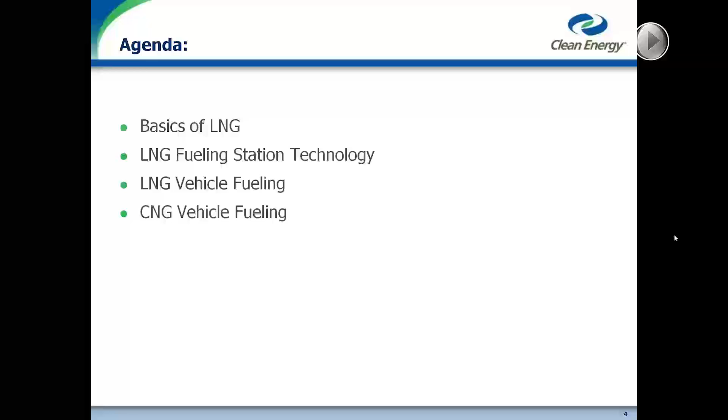The things I'd like to talk about today: anytime we have the numbers 101 in a title, I should give some basics of LNG. I'll give some safety and property information of LNG. Then we'll start discussing LNG fueling station technology, what the stations are made of, how they work. We'll discuss LNG vehicle fueling and then CNG vehicle fueling, and then leave time for questions at the end.

So basics of LNG. Probably most of you have seen some of this before, but for the benefit of those who might not have, I'll go through this quickly. LNG is simply natural gas that's been refrigerated to -260 Fahrenheit, which reduces its volume greatly, 600 to 1, and gives it a final density of about 3.5 pounds per gallon at 0 psi. Now this is a little less than half the density of diesel fuel, but it is quite a bit more dense than CNG, and it's that density comparison to CNG that really makes it viable as a vehicle fuel for many applications.

LNG is made typically at liquefiers that can be dedicated for vehicle fueling. Clean Energy has 2 of them in Boron, California and Willis, Texas, and then the rest of the fuel in the market can come from peak shavers. Peak shavers are just natural gas utilities who are selling excess LNG into the vehicle market that they don't need for buffering their pipeline operations.

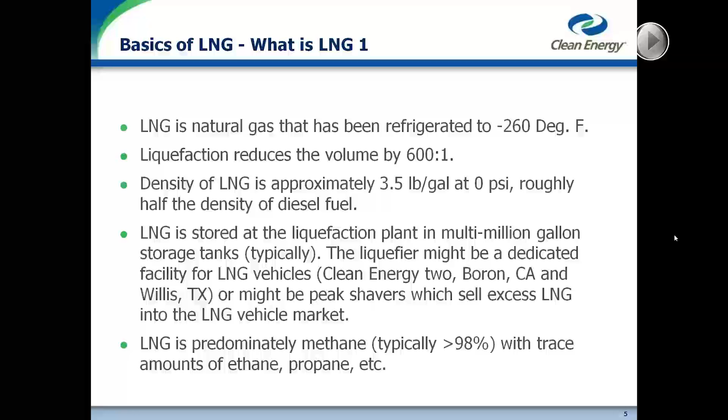LNG is predominantly methane. As we manufacture in our liquefiers, it's typically 97 or 98% methane with a little bit of ethane and propane as trace elements. And this is also typically better than pipeline gas that might be in the CNG compression business, which can be a little more variable than that. So that's also one of the benefits of LNG.

LNG is colorless, odorless, and non-toxic. As far as I know, no attempts have ever been made to odorize LNG in the vehicle business. So it's typically not odorized, which means we use methane detection as safety devices to detect a leak or a spill. LNG is flammable after it vaporizes and mixes with air. Not flammable as a liquid, but as a liquid it will boil off rapidly, mix with air, and then become flammable. That's the whole point of LNG as a fuel after all.

Cold methane is denser than air and can settle in enclosed areas. Once the methane warms, it will rise and disperse as long as it's not inside a building or other enclosure. So the fueling we do typically is out in the open air. There's nothing to prevent the methane from rising and escaping if there is a small spill, so it's relatively safe in that regard.

A more recent application is to make LNG from landfill gas, which is a renewable resource and prevents that methane from going into the atmosphere as a pollutant. And trash haulers especially like that because that gives them a landfill-to-truck source of fuel.

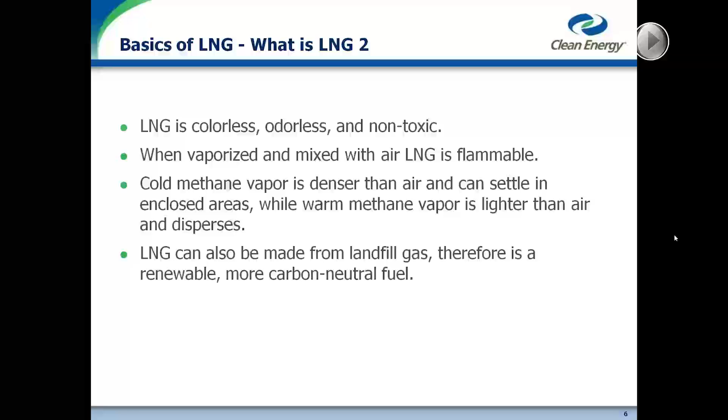Some of the basic hazards, as we said, methane is flammable, but only within a specific range of concentration in air, about 5 to 15%. Outside of this range, it's either too lean or too rich to burn, and is safe in that regard. Since the LNG is at minus 260, there is a hazard for frostbite or freezing if there's direct contact to the skin or eyes especially. So we always want to avoid that.

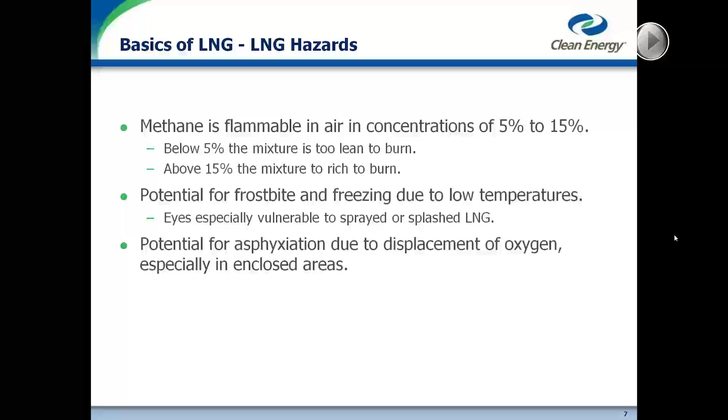And then asphyxiation due to displacement of oxygen is a concern only in enclosed areas generally. Buildings or other enclosures are the main risk there. Again, our fueling stations are typically very open in the outside air, and asphyxiation is not a real concern for that application. Some basic safety equipment we always recommend: cryogenic gloves, a face shield, closed shoes or boots, long sleeves, long pants.

One thing for operators and fleet managers to be aware of is I've seen over time that LNG fueling becomes so routine that operators sometimes don't always put on the right safety equipment. Especially in hotter climates, they may not want to wear long sleeves or gloves. And I think it's always important to be vigilant to recommend and stay up with the protective equipment and training of the operators.

Some basic hazard prevention then is just to always follow the recommended operating procedures, wear the protective equipment. If there's a leak, avoid it and contact the technician to repair the leak. Don't handle cold hoses and piping without gloves. Always keep sources of ignition away, especially smoking. The vehicles themselves, as they pull in for fueling, are not considered a source of ignition per the code. So the normal vehicle traffic is okay, but other vehicle traffic adjacent to the station, we'd like to keep that at least 15 feet away so we aren't bringing another hazard close by.

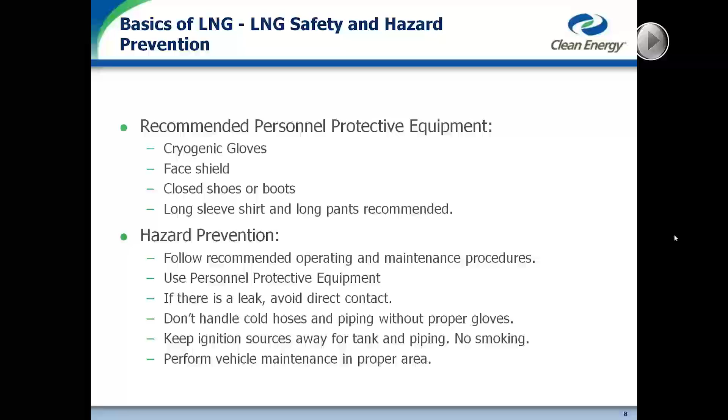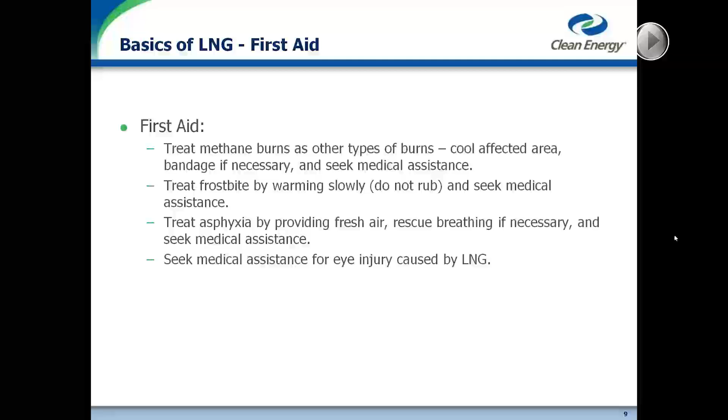And finally, perform vehicle maintenance in a proper area. That means if you work on LNG vehicles indoors, then building modifications are typically performed for ventilation and methane detection. First aid is pretty simple in case of a burn due to a fire, frostbite due to contact with LNG, or asphyxiation. Basically use common sense and seek medical attention wherever appropriate.

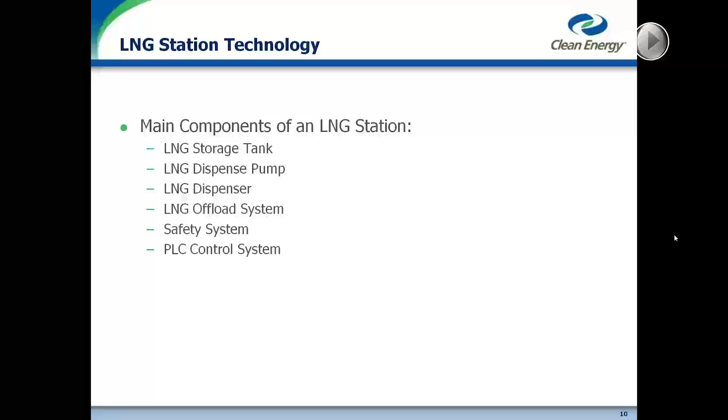Okay, now the LNG stations themselves will be the focus of our discussion. That's our background here at NorthStar and our specialty. I'll kind of discuss the storage tanks, pumps, dispensers, offload systems, safety systems, and PLC control systems. These are the major components of any LNG fueling station.

First, the LNG storage tank. Currently, in the U.S. at least, we are building stations with 18,000-gallon gross capacity storage tanks with 175 psi working pressures. The net capacity of LNG we're allowed to put in these tanks per code is 90% of the gross capacity, and that's true for whatever size tank you might go with.

In the U.S., we're also building most of our stations with the foundations to allow easy upgrade to 2 tanks, and many of our customers would have that feature as well. For sites that have no provision for future expansion, they would just get a foundation for a single tank. Now, we aren't limited to 18,000-gallon storage tanks. We have built stations with up to 30,000-gallon storage tanks for customers with large fleets and high usage requirements.

So in sizing the tank and selecting the right tank, some considerations to take into account. The daily amount dispensed is important because LNG is delivered to the stations at 10,000 gallons at a time in LNG tanker trucks.

And what we'd like to be able to do is use the fuel in the station to the point where it can take a full 10,000-gallon tanker load. And at that point, we need to have a window where we can refuel the station without running out. And if you have a very high usage station, the rest of that fuel may be consumed very quickly, and that makes the logistics very difficult. So at a certain point, if usage goes up, then larger tanks or a second tank would be warranted for consideration.

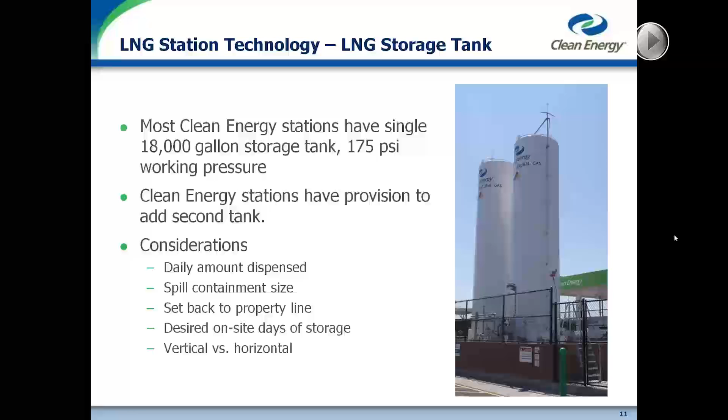As a standard practice, we design our dispensing systems to flow 40 LNG gallons per minute to either 1 or 2 dispensers. In practice, if we're feeding 2 dispensers simultaneously, it might be closer to 35 gallons per minute at each dispenser, but those are our targets.

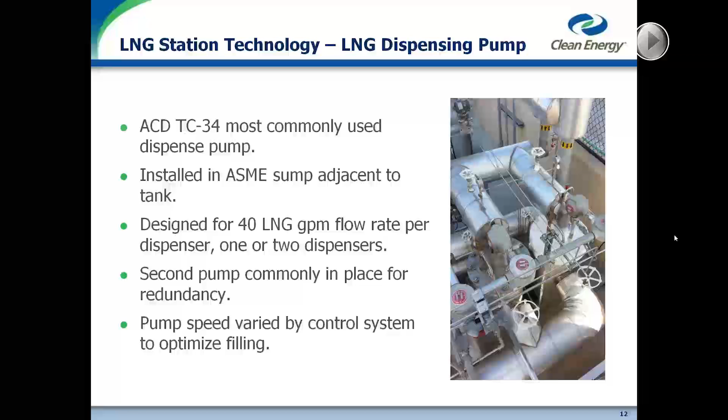and to be fully weights and measures certified, you would also demonstrate accuracy to your local jurisdiction upon startup, which we have been doing for our customers lately. Most jurisdictions do not have the right test equipment and don't know what LNG is, frankly, so typically we will go on site with our test equipment and technicians, demonstrate the accuracy for the weights and measures officials, and then we can get an official certification sticker on the dispenser.

One issue of contention right now is the unit of measure, the DGE or diesel gallon equivalent, is not fully certified yet by weights and measures authorities. That is scheduled for a vote this summer, and hopefully they'll pass it, but that's up in the air. And another result of that is that every provider of LNG has a slightly different conversion factor.

Now the fuel stations are loaded with LNG from tanker trucks, and we use this pump on board the LNG station to pull the LNG from the tanker truck and pump it into the storage tank. Now there's a bunch of different pumps that are suitable for that. We use the same pump design and pump can that we use for our dispense pumps, and for us, we feel that this gives a faster cool down, good priming, and also lets us use the same parts for both dispensing and offloading. One factor to consider is the location of the offload connections.

We like to place them on the back of the station opposite the dispenser so that while you're offloading a tanker truck, you can still be dispensing to vehicles. If your site does not have the room to allow that to happen, or the traffic patterns, then we can put the offloading on the same side as the dispensers, but now you're blocking at least one lane while offloading is occurring. Typical pumping time for offloading is about 70 minutes or about an hour and a half if you include the time to connect the hoses, cool the pump, and then disconnect the hoses when you're complete.

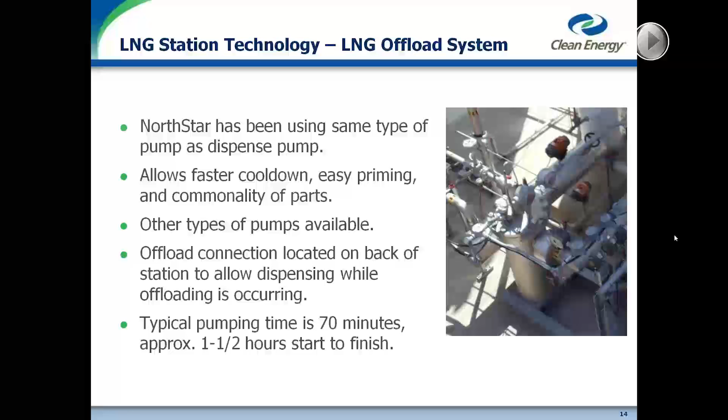All LNG stations have a safety system, including an emergency shutdown system. This is largely dictated by code requirements. Typical implementations will have fire detectors viewing different angles of the station, methane detectors at different locations, emergency stop buttons, which are typically at all the dispensers and at other sites around the perimeter of the station.

And if any of these devices are tripped, immediately all the valves on the station are closed, the pumps are stopped if they're running, and we remove power from all the electrical equipment that's in the LNG dispensing areas or containment area. So that way if there is a leak in progress, we minimize the chance of a fire by taking all the electrical sources out of action.

The important thing to remember too on this, if this system is activated by code, it has to be reset manually at the station. We can't log in and reset that remotely. So it has to be by a technician who is verifying that the station is ready to operate and any issue has been repaired. I think we've mentioned the spill containment already. That's a standard code requirement in the U.S.

We also include an auto dialer or fire alarm control panel. So in the event of any type of emergency alarm or process alarm, such as low tank levels, we can program that to call out to either Clean Energy, if it's a site we manage, or to our customer, or to a third-party monitoring system.

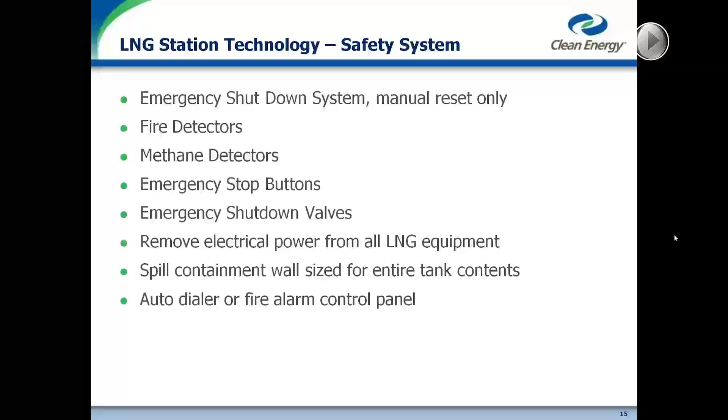And finally, we include on our stations a PLC control system to automate the operation of the station. So the PLC has transmitters which allow it to monitor tank level and pressure, the temperature, pressure, and speed of the pumps, the flow and temperature and pressure at the dispensers, and also for the offload pump. The PLC has operating logic which automatically runs the various processes so that the operator has to do very little except press start and allow the system to operate.

A standard feature that we've also been using for the past 6 or 7 years is to have a built-in web server in the PLC. And what this means is that if we have remote access either through high-speed internet and a VPN or through dial-up modem, you can dial in to the site, and with nothing but a web browser and the right password credentials, you can log into the station, see what's actually happening right now, as if you were standing at the control panel right on the site.

So that's a huge benefit for remote troubleshooting, for maintenance, for checking the status of a station, scheduling liquid deliveries, just in general helping the station run correctly. Now the PLC we program to automatically recover from as many faults as we can, but there are some conditions that may require technical assistance. And as an example, that might be a sensor failure that's out of range. So in those scenarios, we can program the auto dialer to call out to either our technicians or our customers, depending on the location. They're required to then respond to that and repair the problem.

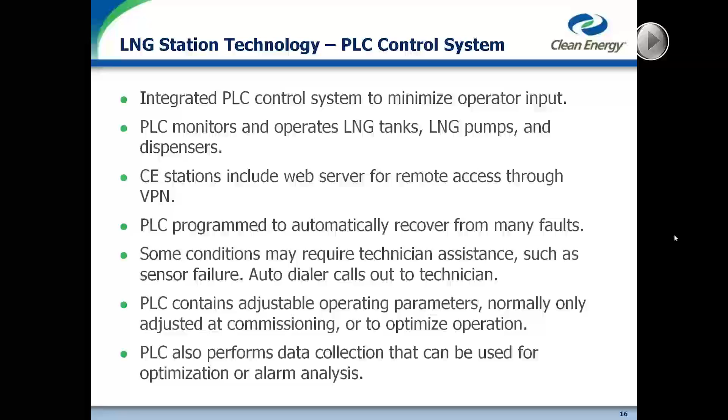And finally, one other thing we do with our PLC is we collect data in the event of an alarm. We save data to a data file of what was happening before and after that alarm occurred so that we can download and analyze what happened and troubleshoot the problem.

Some additional things to consider in terms of LNG stations. Through Clean Energy, we have built over 120 public LNG fueling stations, and we also have competitors that are building them as well now. So if a public station exists in a convenient location for a particular fleet operator, that's a viable option for fueling, and that takes all the maintenance and operations off the hands of the fleet owner. The question is, are those stations on the right routes or near the fleet yard where the fueling needs to take place? In some cases, the answer is no, and so as a result, we do build private stations for customers that have that need.

And in that situation, the main considerations are going to be, who's going to maintain and operate the station. Many fleet owners would like to just contract that out to Clean Energy or another provider. How is that station to be paid for? In some cases, grant funding might be available to offset the cost, and Clean Energy typically helps get those grants allocated. If a particular fleet is starting with a small number of trucks, then a mobile fueler is maybe the appropriate way to go, and then start with that and build a permanent station later when there's more vehicles available.

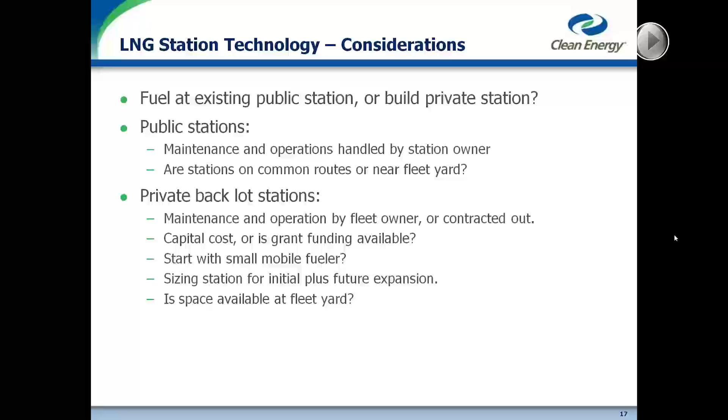A couple other things on stations. LNG dispensers, right now we're typically putting in a minimum of 2 just for redundancy. We don't have a lot of problems with reliability of the dispensers, but our attitude is that we should never delay fueling a customer, and if we have 2 dispensers, we reduce risk of a dispenser problem impeding fueling.

Historically, NorthStar has recommended a maximum of roughly 50 vehicles per day per dispenser as a comfortable fueling usage level, but every station is different and every situation is different. For example, if you are a fleet operator of, say, refuse trucks that go out during the day, come back in the evening, and you want to fuel them all in a short period of time, you may need more than 2 dispensers versus a fleet that fuels randomly throughout the day.

So that needs to be considered in sizing the station. Typically at our stations we feed 2 dispensers from a single pump, but we're also putting in a second pump for redundancy reasons, as I mentioned. If you have a situation where you need 3 or 4 dispensers, then we would normally put in 2 dispensing pumps and perhaps a third pump for redundancy.

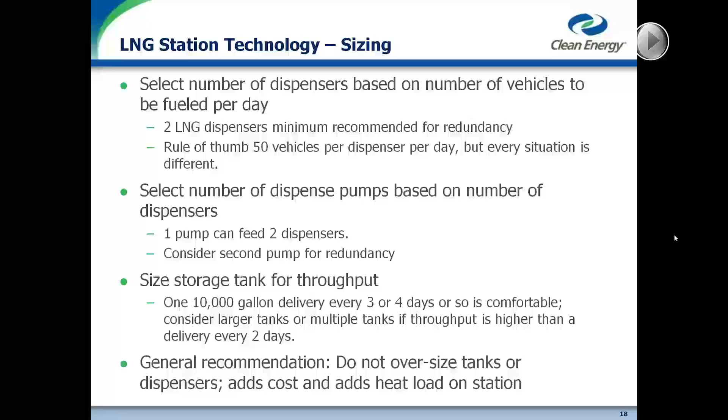I'd like to go on next and discuss some aspects of the vehicle and the vehicle fueling. The way we look at heavy-duty vehicles for over-the-road trucks, we typically define them as using 50 diesel gallon equivalents per day per truck, which is roughly 80 gallons of LNG. Typically, if the usage is much less than that, then I think perhaps the economics don't always seem to work out. But typically with LNG, if you can use a lot of fuel every day, then that really makes the most sense for the investment that's needed.

We dispense at roughly 40 LNG gallons per minute, which is 22 diesel gallon equivalents per minute approximately. So for what we define as a heavy-duty truck, the actual pumping time is 2.5 to 3 minutes or so to fill the vehicle. Now, there's also some time to hook up the hose, to initialize the fuel management system, and so the total throughput might be more like 4 minutes or 5 minutes depending on the operator, but it's really a very fast fueling operation.

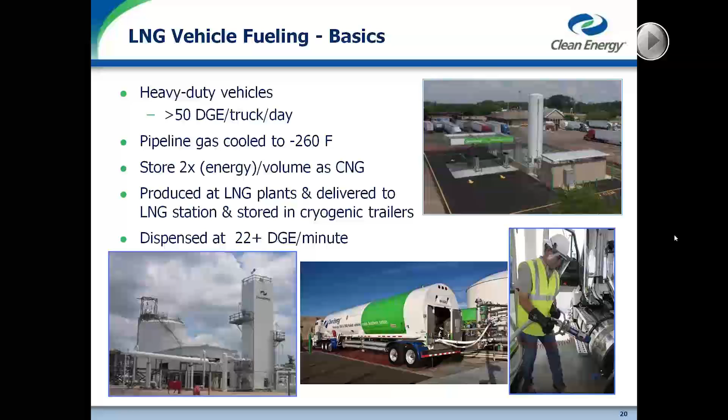For the vehicle tanks, there's really a couple different types on the market right now. We show on the left here a Westport GX vehicle tank, and that one is 119 gallons gross. On the right is a typical tank manufactured by Chart Industries. They're currently making, I believe, 119 or 150 gallon tanks.

And many trucks I've also seen have dual tanks. They'll have one tank on either side of the chassis. And in those scenarios, they'll run the fuel nozzle for both tanks to the driver's side. And I've seen implementations of that where they fill both tanks from a single hose connection, and I've also seen them where they have to move the hose from one nozzle to the other to fill the tank on the far side. And so the selection of the vehicle system really just depends on the range that's envisioned before refueling can occur.

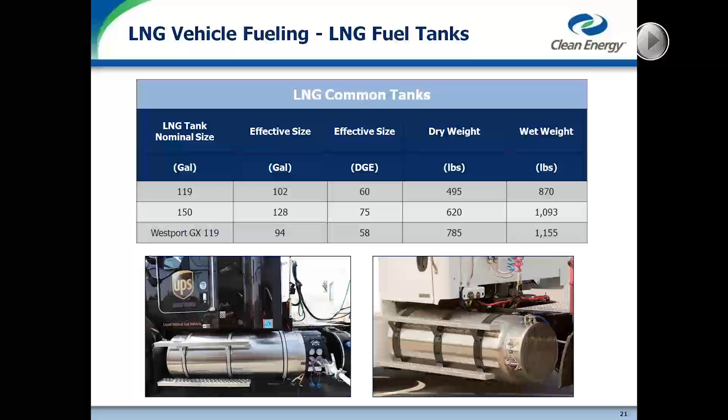One aspect of the engine selection, the Westport HPDIs: I've seen press releases that they are not taking orders on those, but we still fuel very many of them in the U.S. These are the systems that have an onboard high-pressure pump to generate approximately 3,000 or 3,600 psi to the engine. These types of systems can take cold, low-pressure LNG versus the spark-ignited systems down below, which require saturated LNG.

Saturated LNG is basically just LNG that we've warmed up to raise its boiling point to whatever the engine requires, 50 to 80 psi, but 80 psi is pretty typical. And we do that automatically on the station after offloading if it's programmed in that way, so that whatever that fleet needs, we can provide the fuel at the right pressure to support that engine.

And now more recently, Chart and Westport have both introduced systems on the low pressure 80 psi type of engine to allow those systems to take colder, lower pressure LNG. So they have an onboard pump or pressure builder to, say, take 20 or 30 or 40 psi LNG and still make sure they get 80 psi at the engine.

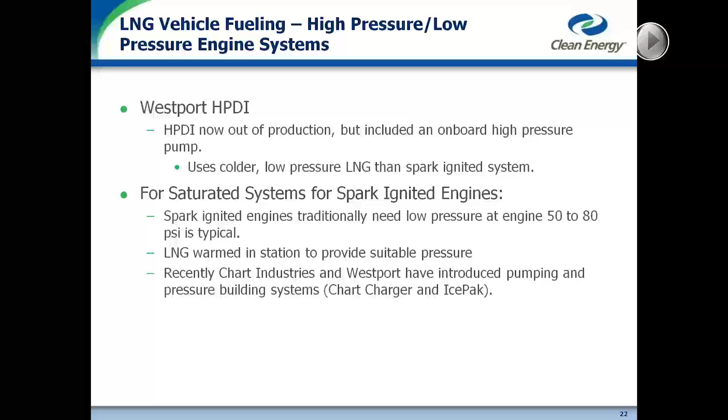Briefly, just some of the advantages of LNG. Without going into specifics, typically we're less costly than diesel, lower greenhouse gas emissions than diesel. That's lower CO2 emissions, although we have to be careful that we don't offset that with methane emissions. We have a nice consistent composition, typically 97% CH4. We have a pretty routine and automatic fueling process, and compared to CNG at least, we have higher density, therefore we can get more pounds of fuel in a given volume on board the vehicle. LNG tanks are typically less expensive than the CNG equivalent for a given range.

Offsetting that, we have to handle the low temperature piping and tanks, which requires personal protective equipment. LNG, if we park it for a long period of time, will eventually raise in pressure and vent out the relief valve. That hold time will vary based on the vehicle, how full it was, what its pressure was when it was parked. We mentioned that we should do building modifications for indoor maintenance of these vehicles. And then what is the station availability? Is there LNG available where you need it, or can you build your own station?

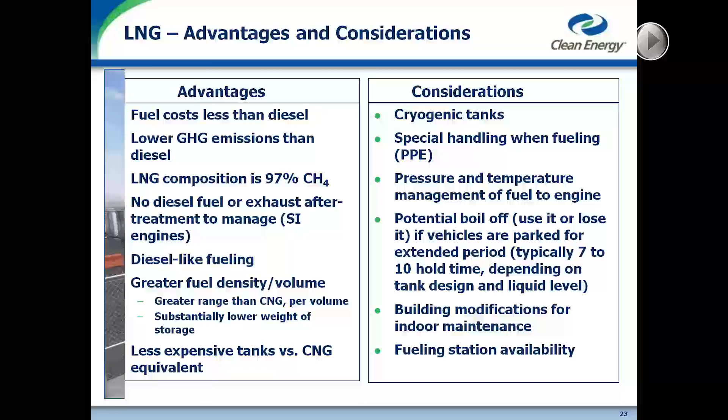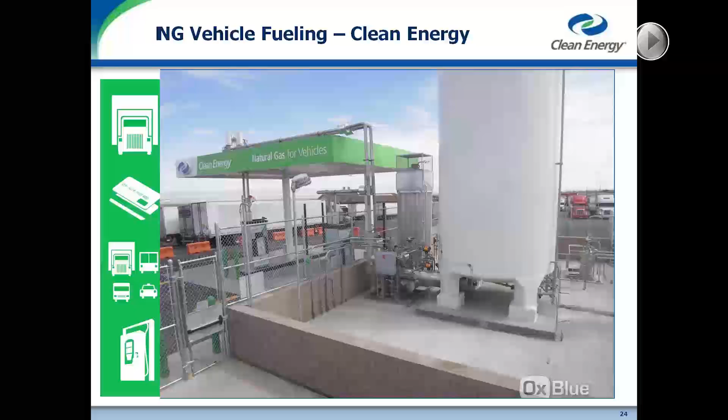A typical LNG fueling station, as we've been building for the natural gas highway, looks something like this. And the current network, as I said, we've got across the country, east to west, north to south in the U.S., over 120 and growing, supported by 2 LNG plants and availability from numerous other sources.

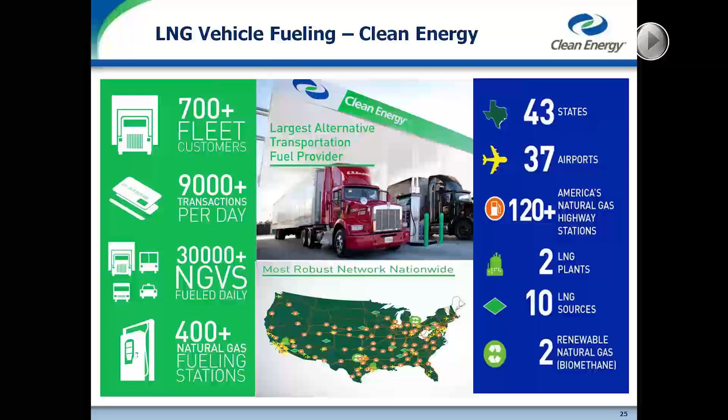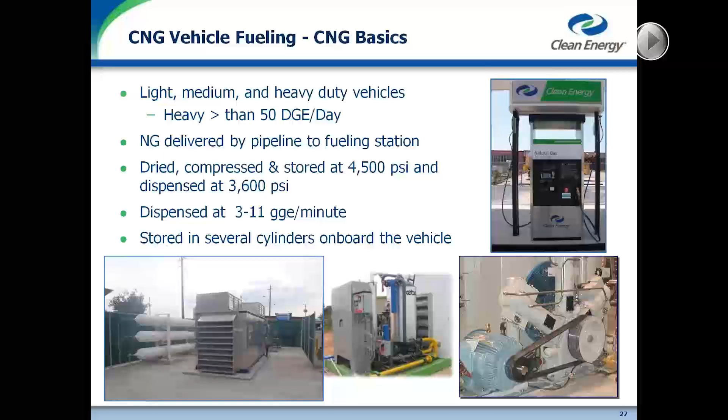A couple words about CNG. It's really not the focus of our discussion today, but typically LNG is competing right now against CNG for the heavy-duty over-the-road truck business. CNG is pretty well known, but another option to consider is LNG to CNG, which NorthStar also manufactures. This might make sense where pipeline gas is not available to put in natural gas compressors. And one benefit of LCNG is that we have lower electrical consumption. It's much easier to compress a liquid than a vapor, by a factor of 10 roughly, and so we have much lower electrical consumption and cost.

By using LCNG, you get the benefit of the LNG composition compared to pipeline gas, which may be more variable. On the other hand, the LCNG is more expensive because we've got to liquefy the LNG, truck it to the site, and then make it into LCNG. So from a true cost comparison, very frequently straight compression CNG is going to be the most cost-effective way to get CNG if you've got pipeline gas available.

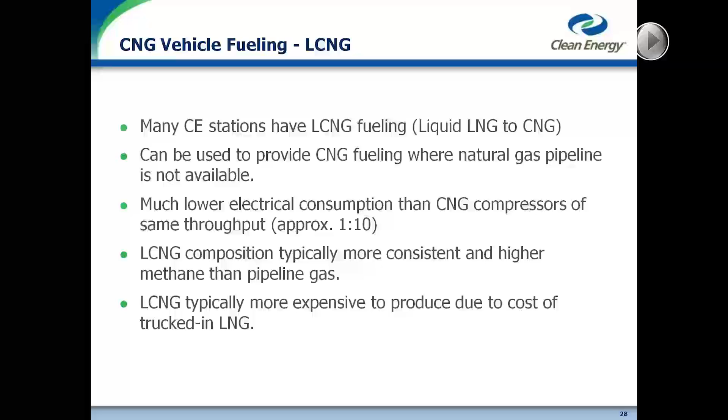Just to summarize then, for CNG, the main advantage there is it's a good fuel for light-duty, medium-duty applications. It's got more infrastructure. Clean Energy themselves owns and operates more than 400 stations. It's equally user-friendly, I think, also very good from a pollution standpoint, and you don't lose the fuel if you park for an extended period of time. Some of the negatives about CNG to consider: the heat of compression, which on a fast fill system is the warming of the gas on board the CNG tanks, which reduces how much gas we can put in. And then consider the weight of the CNG tanks and what that does to your range and your payload capacity.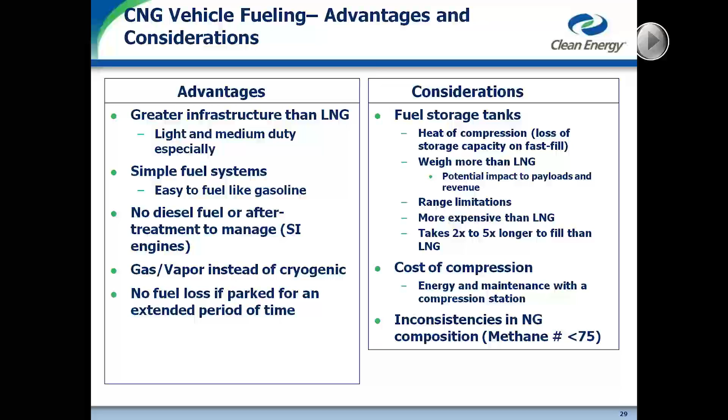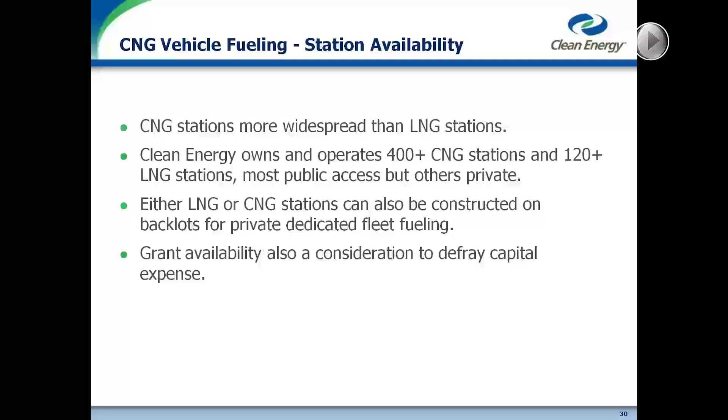And so then just to summarize, Clean Energy does own and operate 400 CNG stations, more than 120 LNG stations, so we're committed to providing either type of station or either type of fuel to our customers, whatever fits their needs the best. And so in conclusion, there's lots of opportunities for LNG as well as CNG, and we should all work together to see what we can do to take advantage of the opportunity. And that is all I had.

Hi everyone, it looks like we're getting quite a few questions, so I'll cover some of those off right now. Dave, what methane detector do you currently use?

We are using a General Monitors methane and fire detector. And I should not quote the number off the top of my head, but we are using a catalytic bead style detector, not an infrared type. So it's a catalytic bead which responds to the methane, and we use a 4 to 20 output so we can read methane concentration in real time.

Perfect. Okay. Thank you. Do you use a standard relay panel wired to GD panel alarm output? I think that refers to the safety systems and the methane and fire detectors. We have a subsystem in our control panel that takes all of the inputs from the safety devices. It's not a separate standalone panel, but it's actually integrated into our control system as a sub-assembly. And that handles the signals from the methane and fire detectors and e-stop buttons and generates the emergency shutdown action that then shuts the station down.